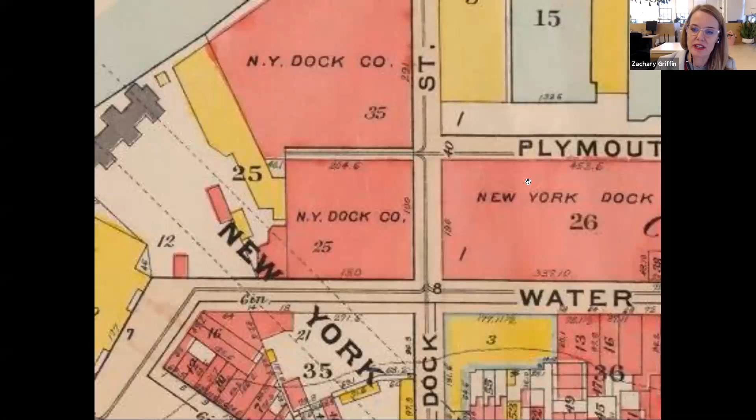It was really built as part of this whole complex where Empire Stores sits today, adjacent to it. And as we all know, in 1870 the Brooklyn Bridge started to be built, over the course of 13 years, and you can see the tobacco warehouse sitting at the foot of it.

In 1901, it changed from the Fulton stores. The Arbuckle brothers purchased the property, and it was transformed from a tobacco inspection site into a coffee warehouse. It held coffee, and the building had that brick shell with a heavy timber structure within it. It wasn't really an enclosed building—it had shutters that closed it off, but it was really kind of an open air building.

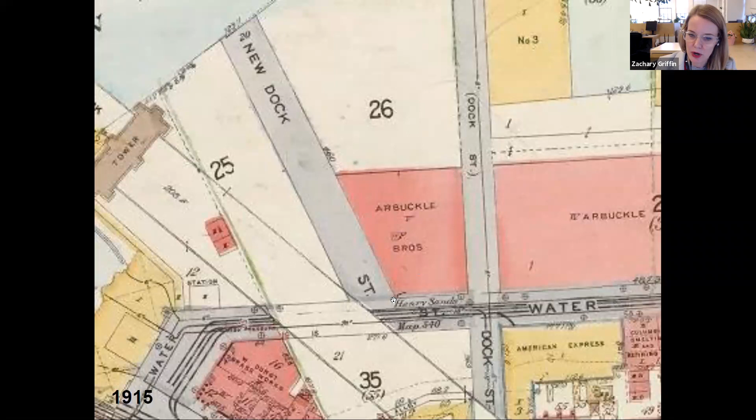In 1915, they built Dock Street, which ran adjacent to the Brooklyn Bridge. At that time, they chopped off a triangle of that building. So what used to be really 2 rectangles, with a party wall sitting right here, became a rectangle and a triangle.

We just wanted to show you what that looked like in 1925. It's still a 5-story building, but again with that angled wall creating that triangle.

Then again in 1946, the building was taken down from 5 stories to 2 stories. It wasn't until 1974 that the Fulton Ferry Historic District became part of the National Registry. Then in 1978, the building was acquired by the New York Office of Parks and Recreation, and it really began to deteriorate over the years.

The wood structure began to fall apart, and the brick was really in disrepair. Then in the late 1990s, lightning struck the building and there was a fire. That was the point where they took the wood structure out, and at some point it was in such disrepair that they almost tore the building down. But preservationists really fought to save it.

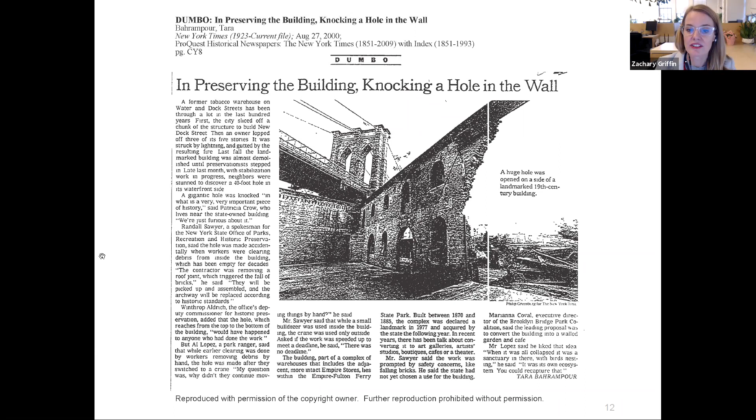In the early 2000s, Robert Silman's office was hired to stabilize the structure and bring it back to life. Over the course of a little over a decade, that's how the building sat—as a historic relic, a shell that was part of the park, open to the public. You could go in and walk through it. On Saturdays, the Smorgasburg filled the structure, so it really became a community asset.

They held weddings there, and even St. Anne's had some performances within the tobacco warehouse. So another big piece of the project is really St. Anne's history itself, and it played a big role in our design and how we thought about the building and how it should be planned and laid out.

St. Anne's Warehouse really started its roots in the St. Anne's Church in Brooklyn Heights. Susan Feldman started a nonprofit to develop performing arts programming, and she convinced the Walentas family to allow her to use a warehouse down in Dumbo, 38 Water Street. It was really there that St. Anne's Warehouse was developed, and they were there for a number of years.

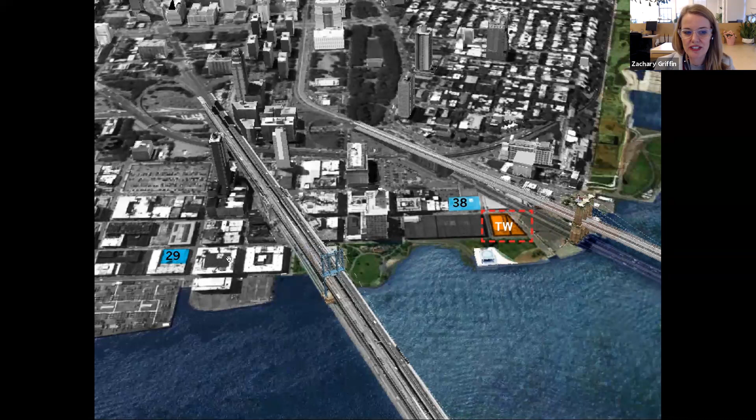You can see the tobacco warehouse just diagonally across the street. That building was later taken down for a new development, for a temporary period. While we were designing and building the tobacco warehouse, they were located at 29 Jay Street for about 3 years. But 38 Water Street is the building they were in for well over a decade, and it really became the DNA of St. Anne's Warehouse—again, really close proximity to where their home is now.

But the warehouse itself really lent to establishing their reputation for flexible performance. Every time you went into St. Anne's, you would experience something totally different—the place would be reconfigured in a completely different way than it was the last time you were there. That was really important to our design, that we'd be able to provide a space with that flexibility.

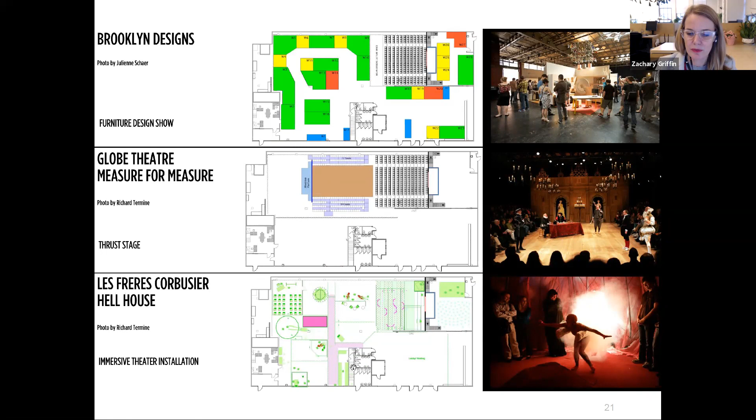You can see some of the different performances that happened in that 38 Water Street space. They had Brooklyn Designs, the furniture design show, there, along with a number of different configurations, including a more immersive performance. And Black Watch was a show we really wanted to make sure we could accommodate—a traverse, something really long.

That was something we kept going back to. Well, can it fit Black Watch?

So we're going to just kind of step you through a little bit of the design process, and then Zach's going to talk a little bit more about some of the details of the project.

During that time, we began talking to Susan, and we were really happy to be brought on board to design and work on the project. It was very much a collaborative effort with Charcoal Blue, Buro Happold and Silman, and really with Susan Feldman leading the effort and dictating where we were going with the design.

It was really about how we could fit the main theater space and also the studio theater, which would become a community space where anyone in the community could come and rent that space through Brooklyn Bridge Park.

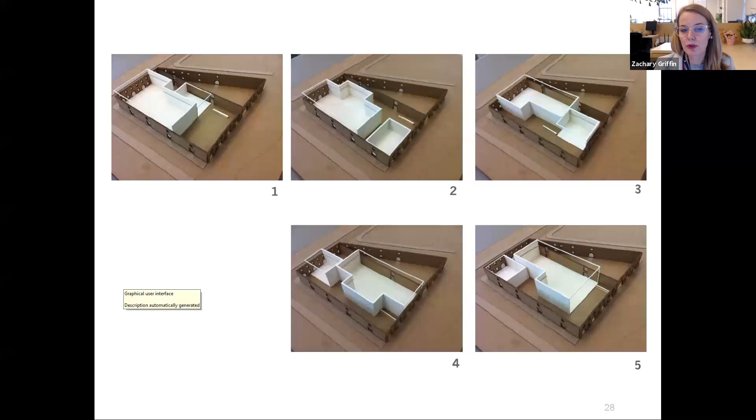What we came to very quickly was the idea of creating this volume that would house all of the program other than the main theater. So the dressing rooms, the restrooms, the St. Anne's office, mechanical, and even that community room would sit within what we ultimately started to call the bunker.

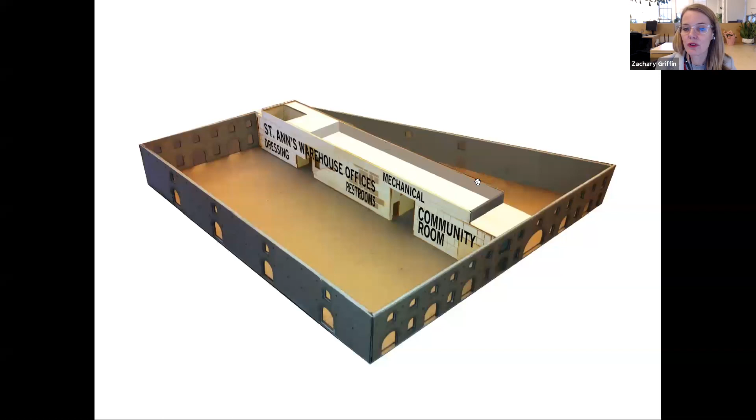That would sit really between a rectangle and the triangle, and that would allow us to leave the triangle open and begin to create a warehouse and theater space for St. Ann's. Inside that, we would insert a steel structure that would hang a catwalk, running throughout that entire space and allowing for ultimate flexibility for performance.

Ultimately this would create that new warehouse for Susan and leave the triangle open to the public, as part of the park.

Another important thing was thinking about how we wanted to enter the building, like what was going to be the front door. The design really embraced the idea of allowing the building to be very porous and allow you to come into the building in different ways.

Depending on how they set up the show, maybe they would direct people towards one door or the other. But we did want to have a connection directly from the triangle into the main space.

We wanted the waterfront to feel very welcoming and open, but also many people come down Dock Street, so it made a lot of sense to have access down Dock Street.

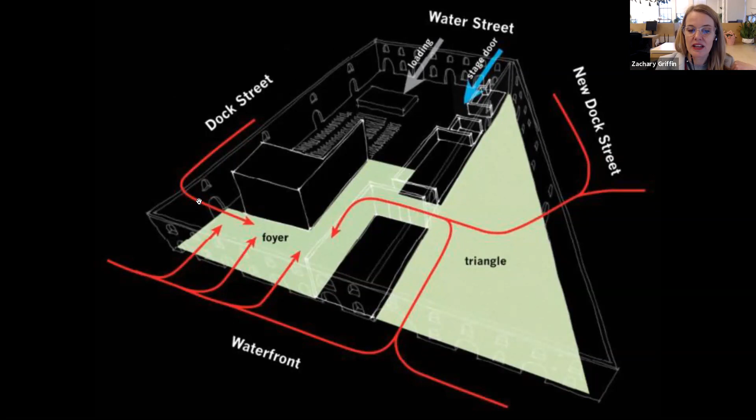Another important thing was that the community really wanted to keep that visible connection through when the building sat as a shell. They wanted to make sure there was an opportunity, when walking down Water Street, to see all the way through the structure and to the waterfront.

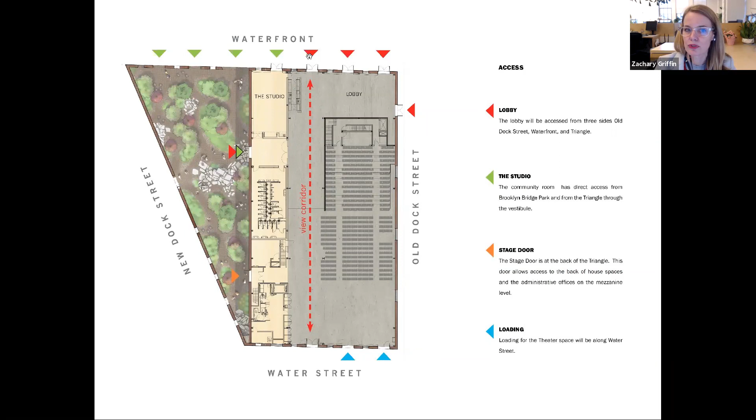With this configuration, we began to test how we could fit a large concert with 800 people, what was the standard configuration with 330 people, standard end stage, and then a more linear configuration like that Black Watch performance.

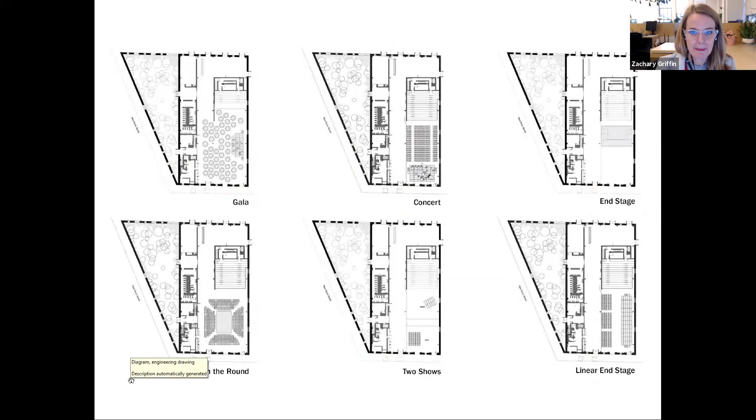This is just a section showing how the building started to lay out, where we would have all of the program within that bunker space, the main theater as that main volume, the catwalk taking up as little space as we could, and then mechanical and structure on top of that.

What that really led us to was that the existing brick wall—we had about 7.5 feet that we needed to rise above that. We started to look at the proportion of that and what that would become.

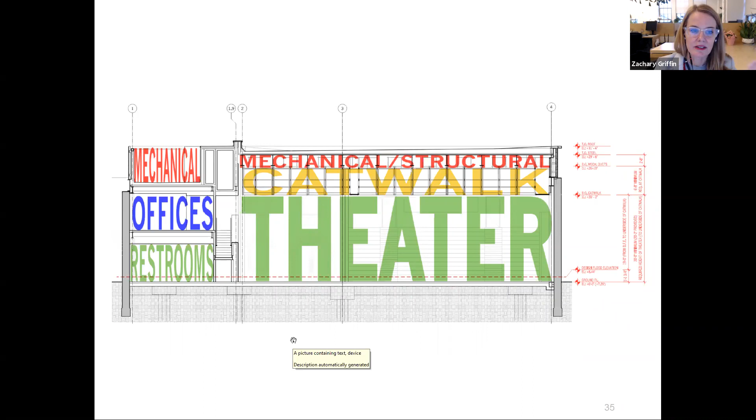These are some very early massing studies from October 17th, 2012, where we were really looking at how much that wall was sitting above the existing brick wall.

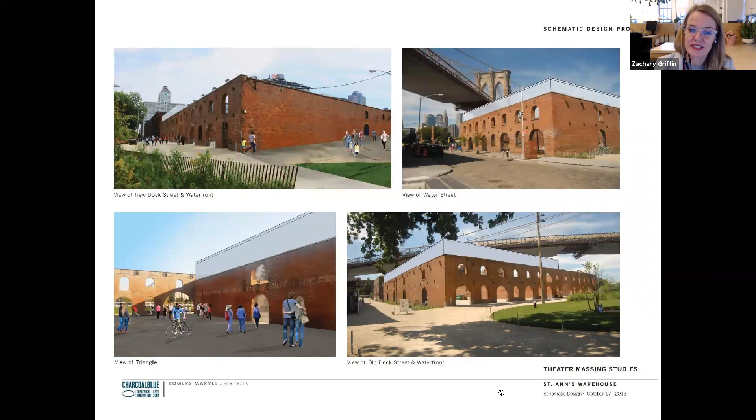But just a few days after that October 17th presentation, Superstorm Sandy hit. This is an image—the tobacco warehouse is sitting right there, and a tremendous amount of water came into our beautiful structure, and really made us think about the project in a little bit of a different way.

So you can see that this is an image of the building just after Sandy. That's the water line of where the water was inside the building. Zach's going to talk through some of the decisions that we made as we worked through that.

Thanks, Lissa. Without changing the overall design concepts, it was very much a rethinking of how we are thinking about the building in terms of resiliency. Lissa mentioned that St. Ann's Warehouse needs a certain playing height for the types of performances they put on, and that's about 20 feet. So that's the space we are providing below the catwalk area.

After Sandy, as many of you are aware, there are new design flood elevations that we were having to contend with. Not wanting to raise the building height up more than we had to, and paying respect to the height that St. Ann's needed for their performances, we realized we had an issue that we needed to take a look at.

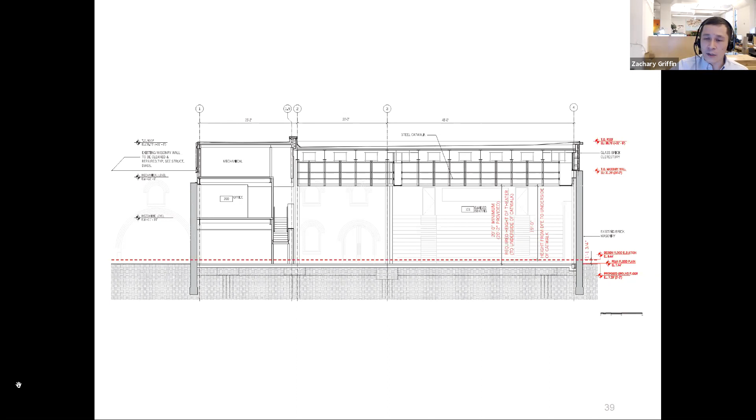So we started thinking of ways that we could either design to the design flood elevation or propose a different way of doing it. We explored a lot of different ways of trying to comply with it, and none of them really worked. Floodgates and dry flood proofing would be a challenge because the weak point would become your masonry walls, where water would end up seeping in anyway.

So we ended up proposing to build the ground floor below the design flood elevation and going through BSA to do so. To do that, we proposed a series of resiliency measures. The major one was locating all of the mechanical and theatrical systems above the ground floor, so the only thing happening at the ground floor would be incoming services, routing everything up to equipment located on upper levels and then feeding down.

Ideally, in a performance space, we had originally been thinking about providing conditioned air from below because of acoustics. Sandy made us realize that was probably a bad idea.

We also looked at different construction methods. On the ground floor, we used masonry walls for the lowest portion of the partitions, so that we could allow water in during future events. The only thing that would be sacrificed would be the wall finishes themselves.

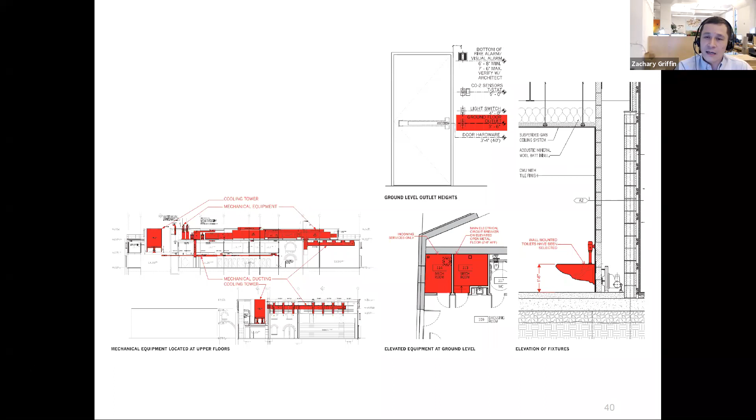You can see that construction here on the bottom right. It also informed our decisions on interior finishes, choosing things that weren't precious but also played into the aesthetics of St. Ann's, and could easily be replaced if a future event were to occur.

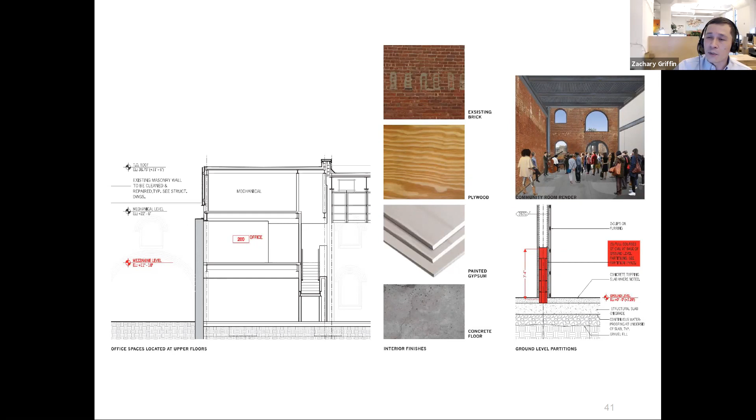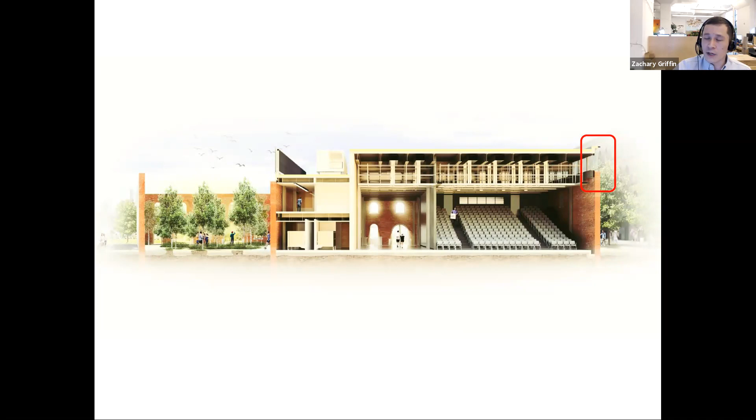We were still dealing with the issue Lissa mentioned earlier, of how to accommodate that change in elevation above the existing height of the walls and the clerestory height needed to accommodate the catwalks. So we explored many options. This is, I would say, a select handful of many more that aren't on the screen right now.

We were trying to find the right material that would both complement the existing masonry but also demarcate the new construction versus the old construction. We looked at a lot of glazing options, a lot of more solid opaque options, but it was difficult to find something that really blended the two and had them be complementary.

We finally came around to a glass product, a glass brick product, and that really ended up being the favorite. It was an organic texture that spoke to the existing brick, but was also a clear way of noting the existing versus the new in a way that lets you experience and see the existing walls as you would normally. You can see the glass brick reflects some of the sky, so the new construction is clear in what it is, but it lets you see the existing masonry walls for what they are.

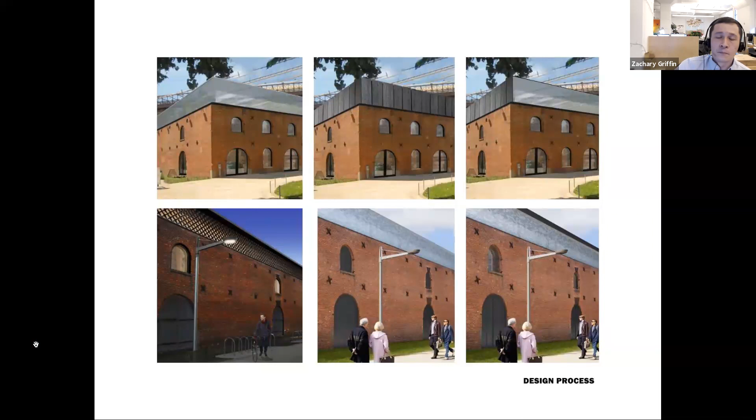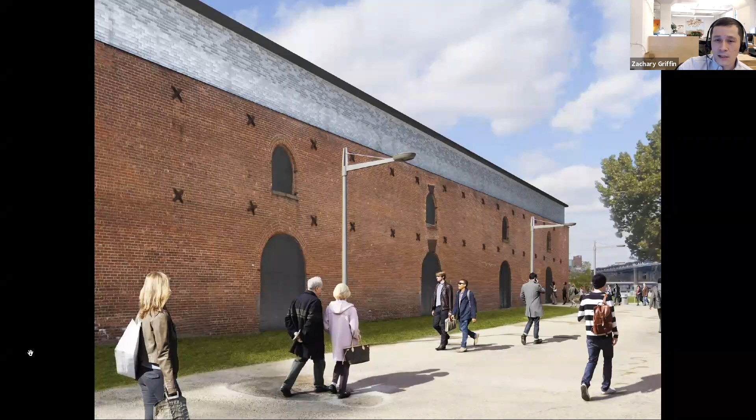So this is a view from Old Dock Street looking down, and you can see that glass brick clerestory slightly inset from the existing masonry walls.

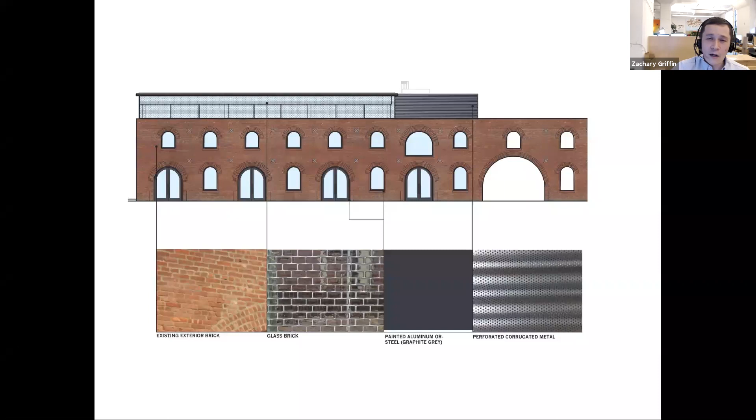We developed this detail for the glass brick with Pittsburgh Corning, who makes this product, and it ended up being a perfect fit for the building because it's a solid glass brick, not like a hollow glass block. In that way, it's very good for acoustics, which is great for the theater. It also allows daylighting into the space, which in a theater atmosphere is a rare commodity for the folks working there on a daily basis.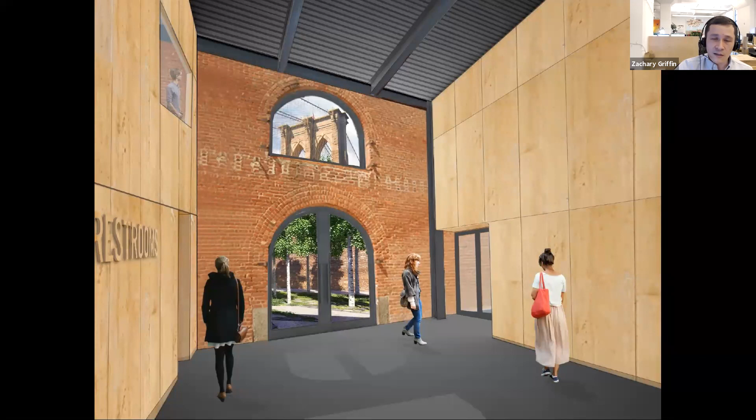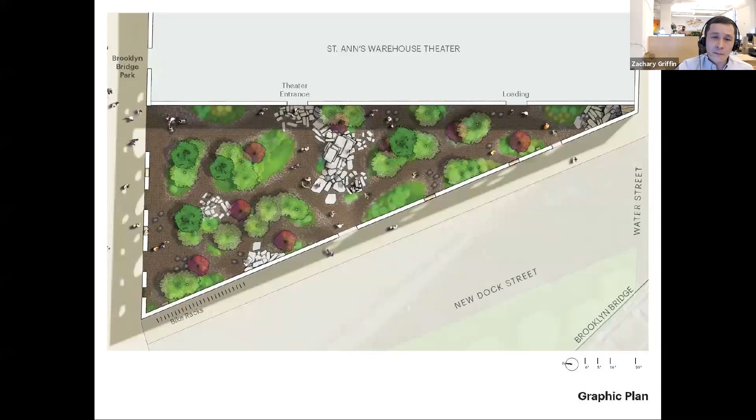We also worked very closely with Michael Van Valkenburgh's office to design the triangle garden. MVVA also designed Brooklyn Bridge Park, so it was a perfect fit to have them come in and do the triangle garden. I think it ended up being a seamless connection between the greater park itself and the triangle garden, but at the same time the triangle garden is this nice quiet respite within the park, its own unique moment.

So this is a nice instance where this is open to the public. It's part of the park, but it's very much also part of St. Ann's entrance.

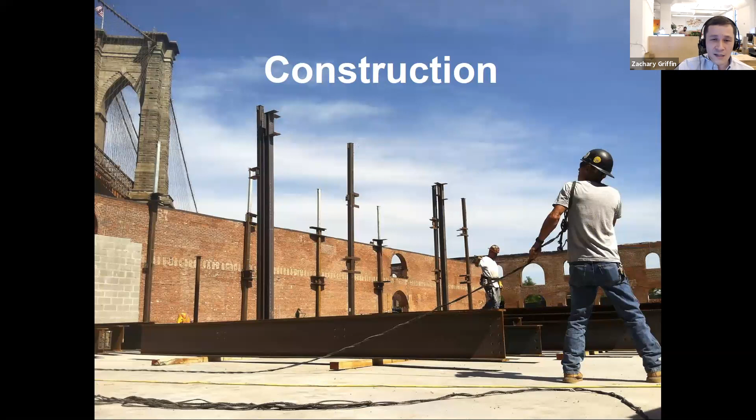So with the design in hand, we moved into construction. We thought, because this is an existing masonry shell only, adaptive reuse with exterior walls only as the existing condition, issues might be minimized on this project, but they ended up not being. So immediately upon starting construction, some of the things that Lissa and I had been apprehensive about came to fruition.

During design, we were working from two-dimensional surveys in plan and elevation of the existing walls. We had hesitation with that because we knew those walls were not braced at the top for many, many years, and so there was a lot of bowing and bending happening within the walls that we were afraid wasn't being captured in two-dimensional surveys.

When construction started and the steel erector came on to do their surveys, they noticed that, in fact, some of the column locations with our new steel column grid were hitting instances where the masonry walls were bending quite radically inward and outward as the wall moved up vertically.

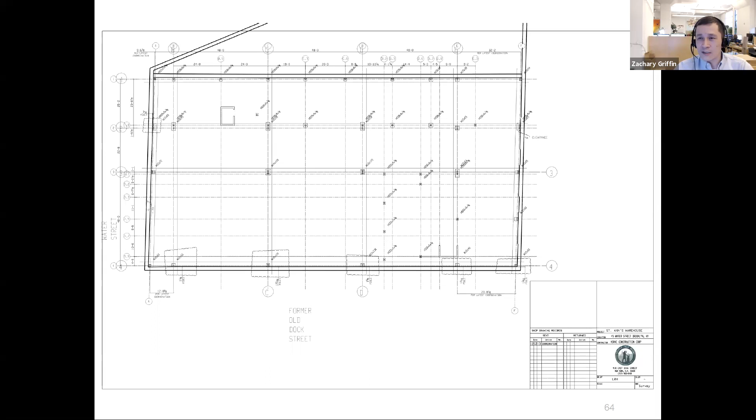Luckily, our CM commissioned a three-dimensional point cloud survey immediately after making that realization, and we had a very detailed three-dimensional survey of every part of the wall. With that in hand, we were able to slightly readjust our structural grid and recommence with construction.

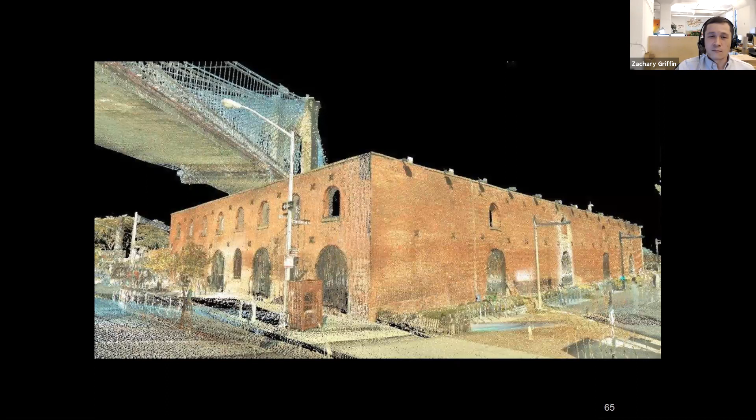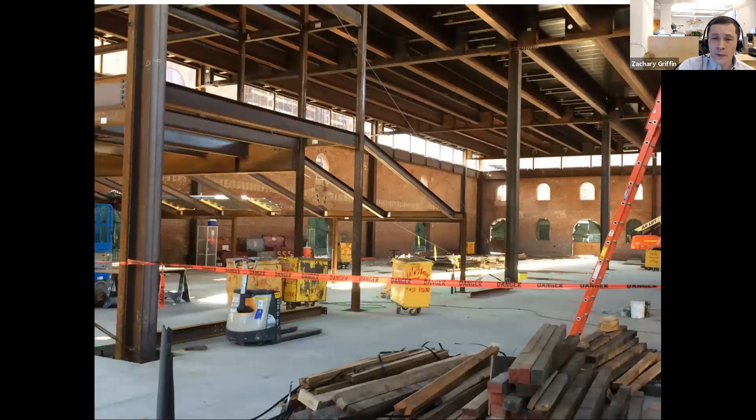Here you can see the steel structure being erected, and inside, the slab has already been poured, the new slab. In this picture, the steel is still going up, but you get a sense of how the clerestory is coming together, and you can see the beginning of the permanent portion of the seating rake being formed right here.

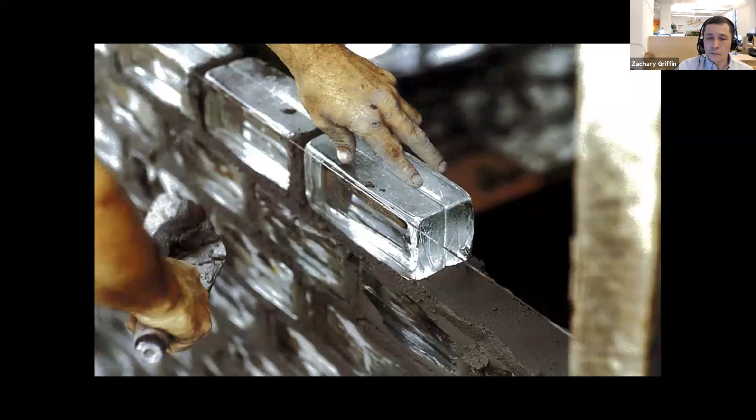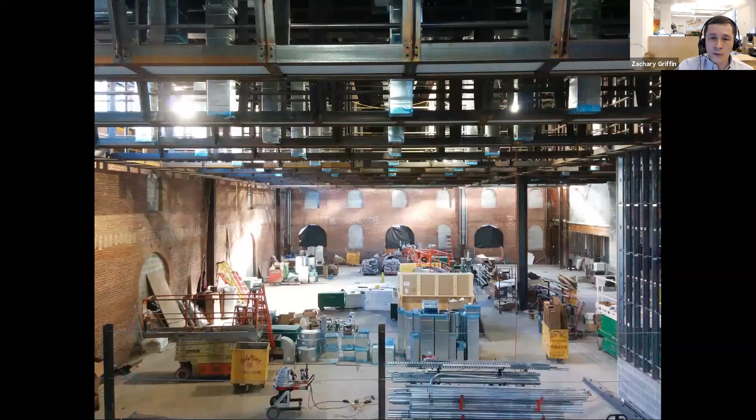This image is with more of the catwalk done, and you really get a sense of that field of catwalk creating the plane of the ceiling within the space, but also how it allows for any type of configuration to happen below because you have so many fixing points. You can also see these silver elements are mechanical ducts, from locating the equipment above and then feeding air down through the space.

And with that, I'll hand it back to Lissa, who will talk a little bit about some completion images of the project. Great, thanks Zach. Yeah, we wanted to just take you on a tour a little bit of the finished space and try and point out some things as we go.